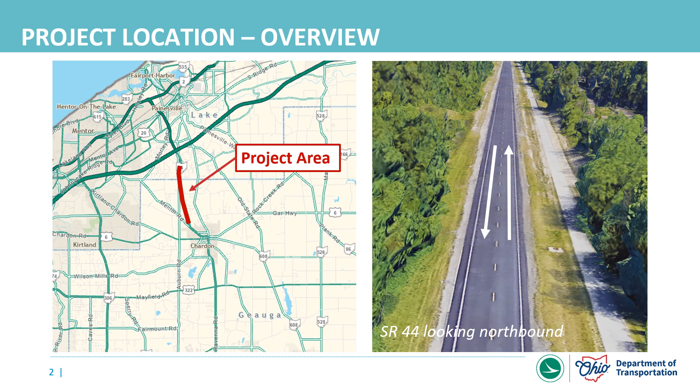The primary purpose of the project is to enhance the condition of the pavement. We also have a secondary objective of improving congestion and safety within the corridor.

To provide some context, let's look at the crash data from 2017 to 2021. During this period, there were a total of 112 crashes in the corridor. Of these, 44 were animal-related, 27 were rear-end collisions, 17 were angle collisions, and 13 involved fixed objects. 46% of these crashes occurred at the study intersections. The intersections with the highest number of crashes were Hosford Road with 23 crashes and Girdled Road with 20 crashes.

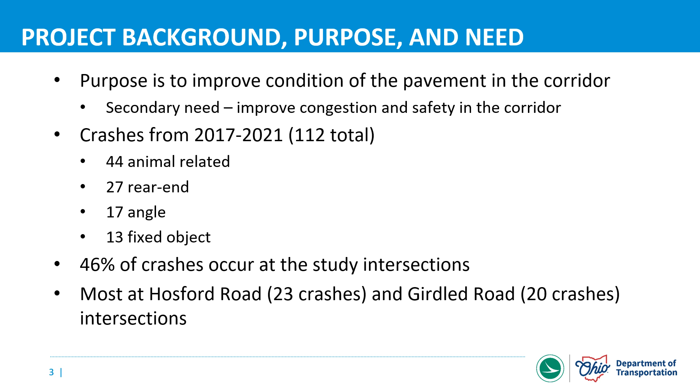Let's break down the main issues in the corridor. Number 1, poor pavement conditions. Number 2, congestion. Rear-end crashes can be a sign of congestion issues. Vehicles are often unable to stop in time due to heavy traffic, leading to frequent collisions.

Number 3, safety concerns at intersections. Nearly half of all crashes occurred at intersections, with the highest numbers at Hosford Road and Girdled Road. These areas are particularly hazardous, contributing significantly to the total crash counts.

To address these issues, we are proposing the following improvements. Number 1, resurfacing State Route 44. This will improve the overall pavement quality. And number 2, adding turn lanes and widening the road at key intersections. This will help alleviate congestion, making it easier for vehicles to maneuver and reducing the risk of rear-end collisions.

Additionally, these changes will enhance safety at our most problematic intersections, specifically targeting areas like Hosford Road and Girdled Road. By addressing both the pavement condition and the secondary issues of congestion and safety, we aim to create a safer and more efficient corridor for all users.

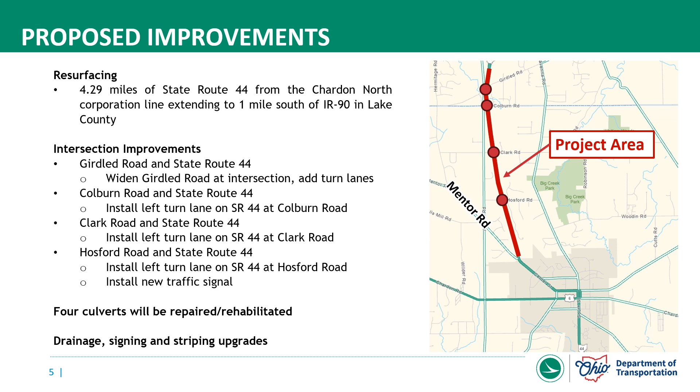In addition to these, we will also repair and rehabilitate 4 culverts along the corridor and upgrade drainage systems, signing, and striping.

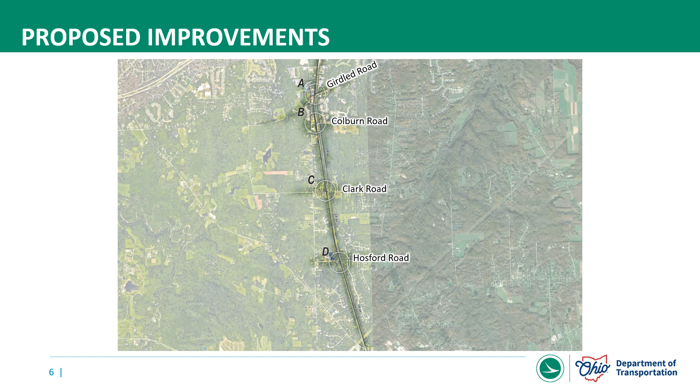This image highlights the project area and 4 intersection locations where additional improvements are proposed. The 4 intersections are labeled A, B, C, and D.

The first intersection we will take a look at is location A, or the intersection of Girdled Road and State Route 44. Please note, north is to the right of the screen. This plan view rendering illustrates the proposed improvements at the intersection, including the widening of Girdled Road and the addition of new turn lanes to enhance traffic flow and safety.

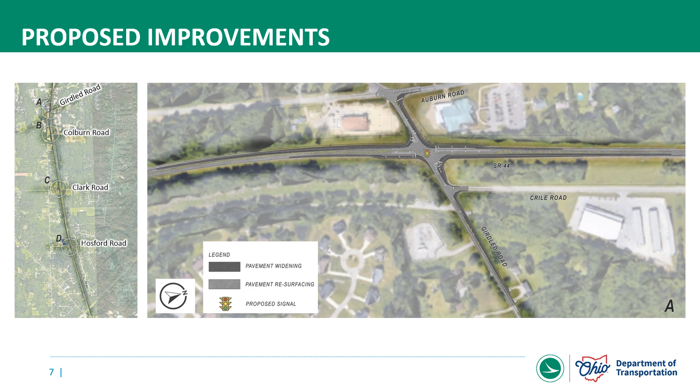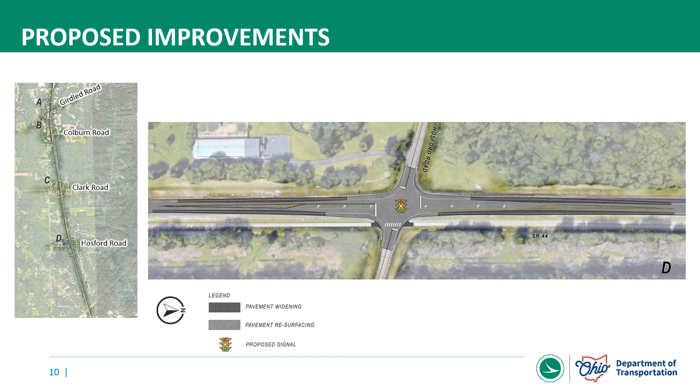The last intersection is location D, the intersection of Hosford Road and State Route 44. This plan view rendering illustrates the proposed improvements at the intersection, including the addition of new turn lanes and a new signal to enhance traffic flow and safety.

Anticipated ecological impacts include impacts to wetlands and suitable wooded bat habitat. If impacted, necessary waterway permitting will be obtained and tree removal will occur between October 1st and March 31st to protect possibly present threatened and endangered bat species during their summer roosting period.

Some utility impacts are expected. Permanent and temporary right-of-way is also expected. If right-of-way acquisition is necessary from your property, a real estate representative will contact you directly at a later date to discuss the right-of-way needs, the acquisition process, and your rights under that process.

At this time, no major impacts to traffic are anticipated outside of short-term lane closures during off-peak hours for work zone setup and reduced lane and shoulder widths. Nighttime work is expected. The following slides depict the anticipated maintenance of traffic for the project.

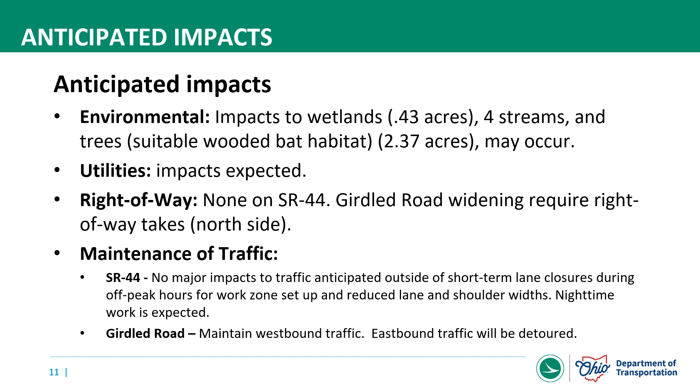Westbound traffic will be maintained through the construction zone, allowing vehicles to travel west without needing to detour. Traffic from State Route 44 heading west will be able to proceed through the construction zone without any detours, minimizing disruption for westbound travelers. Eastbound traffic will be detoured through the construction zone for approximately 120 days.

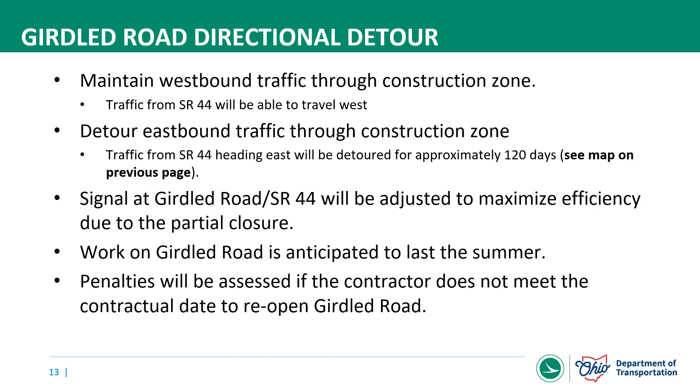The signal at Girdled Road and State Route 44 will be adjusted to maximize efficiency during this partial closure, aiming to reduce delays. Construction work on Girdled Road is anticipated to last throughout the summer. Penalties will be assessed if the contractor fails to meet the contractual date for reopening Girdled Road, ensuring the project stays on schedule and minimizes prolonged disruption.

At the intersections where widening will occur, the first phase of maintenance of traffic will shift traffic to the east so that the western side can be widened. The second phase will then shift traffic to the west so that the eastern side can be widened.

On State Route 44, where there is a center left turn lane, all lanes of traffic will shift to the east so that the western side can be widened. Once that side is widened, all lanes of traffic will shift to the west so that the eastern side can be widened.

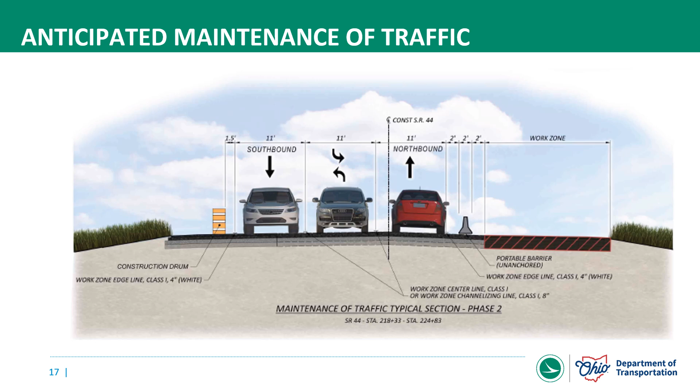The public comment period will close on August 10th. The team will then review all comments received and issue responses. Responses to the public comments will be posted on the website by September 13th. The project design will then be finalized and right-of-way acquisition will occur from fall of 2024 to fall of 2025. Construction is tentatively scheduled to begin in 2026 and will last approximately one construction season.

There are numerous ways to submit your comments. You may submit them through this web page. You can call Tom at 216-584-2086, email Tom at tom.sorge@dot.ohio.gov, or you can mail a comment form or letter to Tom at the Ohio Department of Transportation, District 12, 5500 Transportation Boulevard, Garfield Heights, Ohio, 44125.

Comments are accepted at any time. However, we request that you submit your comments by August 10th, 2024, in order to be documented and responded to during the official public comment period.